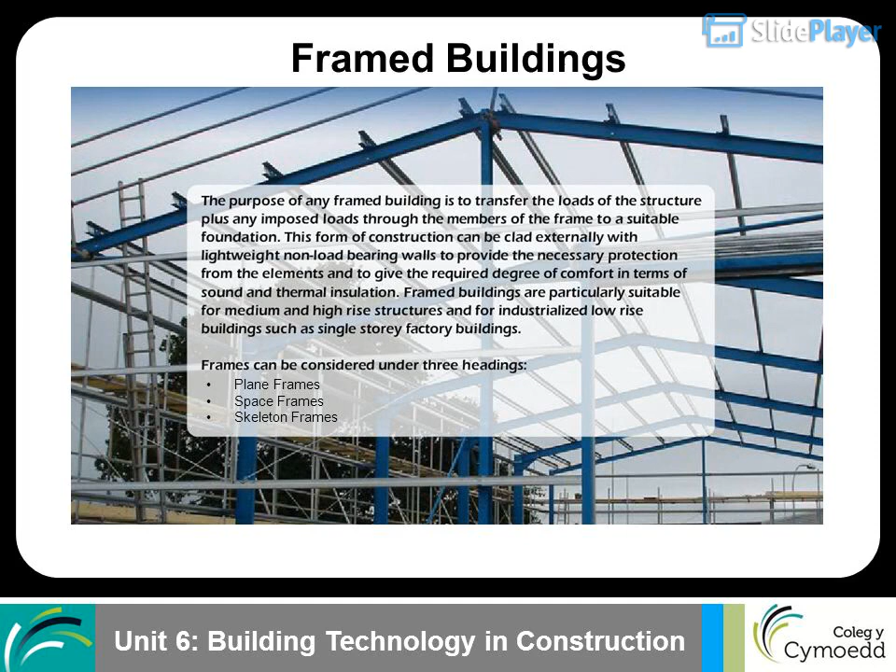Frame buildings: plane frames, space frames, skeleton frames. Frame buildings, plane frames. These are fabricated in a flat plane and are usually called trusses or girders according to their elevation shape. They are designed as a series of connected rigid triangles which gives a lightweight structural member using the minimum amount of material. What are the main uses? Roof construction and long span beams of light loading.

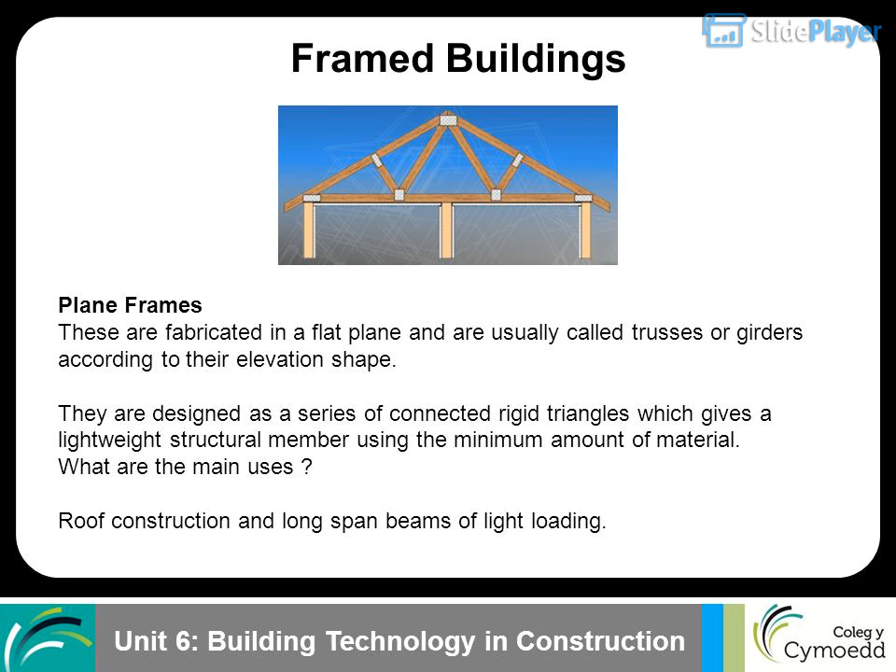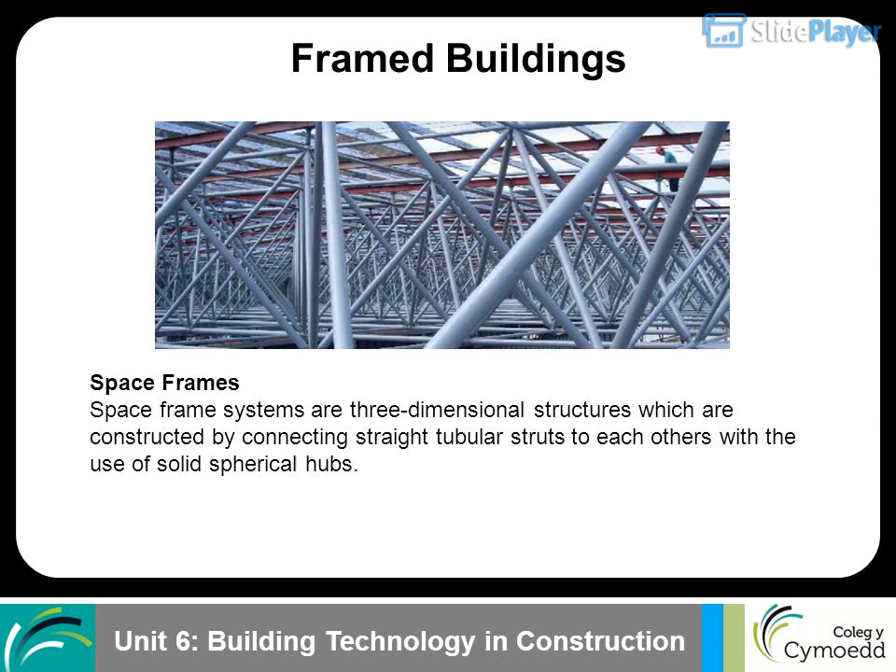Frame buildings, space frames. Space frame systems are three-dimensional structures which are constructed by connecting straight tubular struts to each other with the use of solid spherical hubs. Because space frame systems are three-dimensional structures which work in two directions, for large spans they provide economical solutions. It is possible to cover spans up to 100 m without columns by using space frame systems. They provide great flexibility in the selection of support locations and allow application to different geometrical shapes and areas.

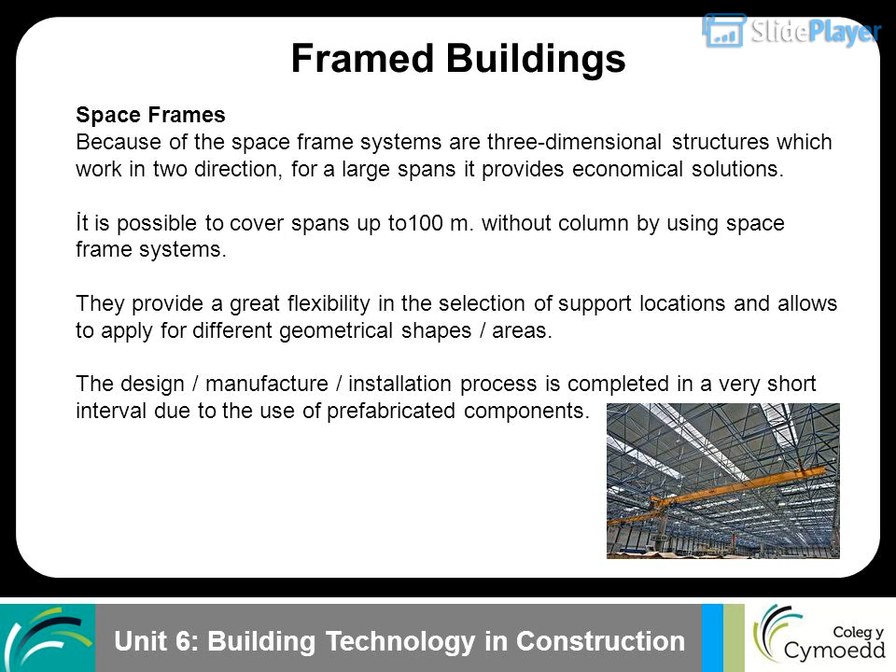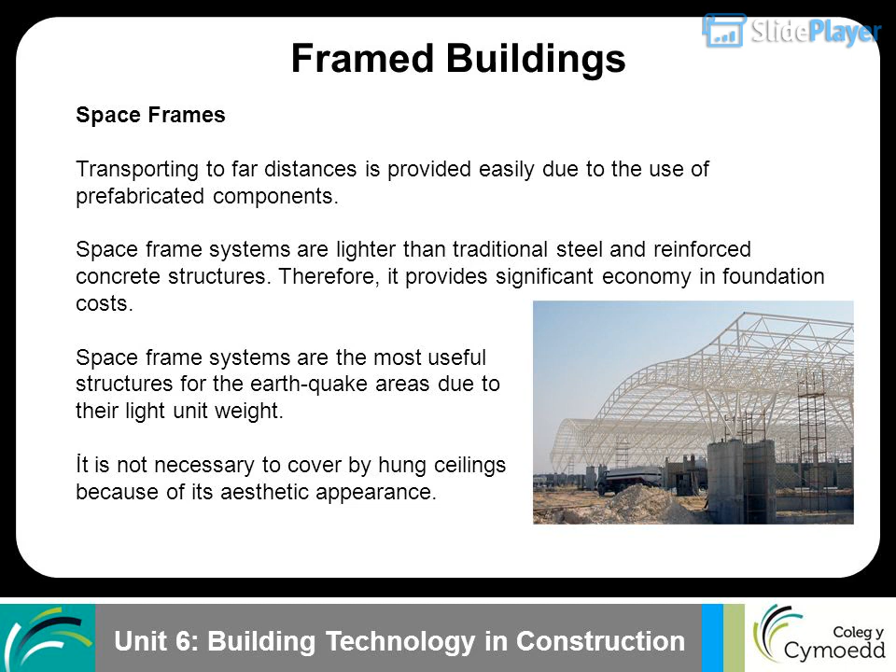The design, manufacture and installation process is completed in a very short interval due to the use of prefabricated components. Transporting to far distances is provided easily due to the use of prefabricated components. Space frame systems are lighter than traditional steel and reinforced concrete structures. Therefore, they provide significant economy in foundation costs. Space frame systems are the most useful structures for earthquake areas due to their light unit weight. It is not necessary to cover them with hung ceilings because of their aesthetic appearance.

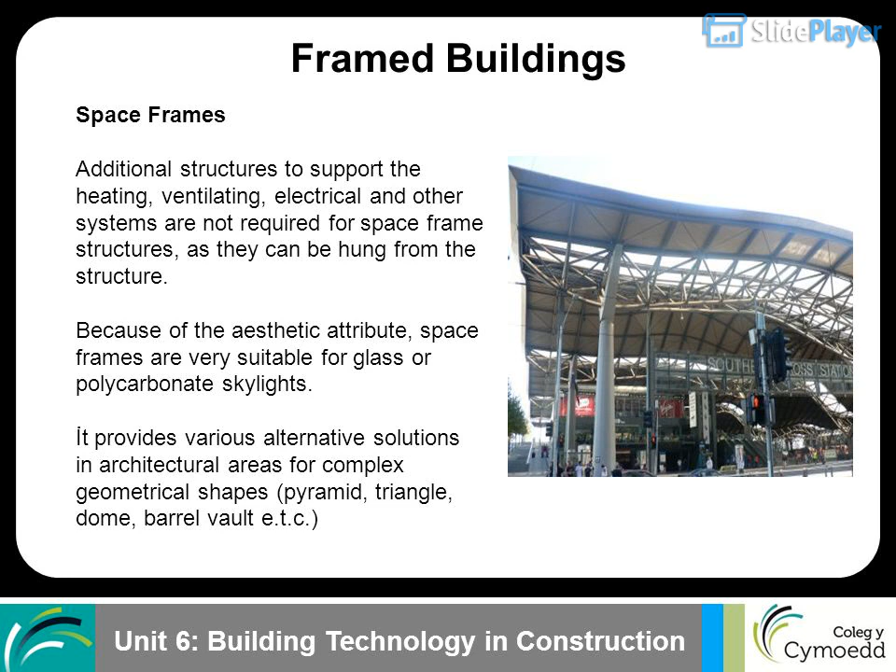Frame buildings, space frames. Additional structures to support the heating, ventilating, electrical and other systems are not required for space frame structures, as they can be hung from the structure. Because of the aesthetic attribute, space frames are very suitable for glass or polycarbonate skylights. They provide various alternative solutions in architectural areas for complex geometrical shapes: pyramid, triangle, dome, barrel vault etc.

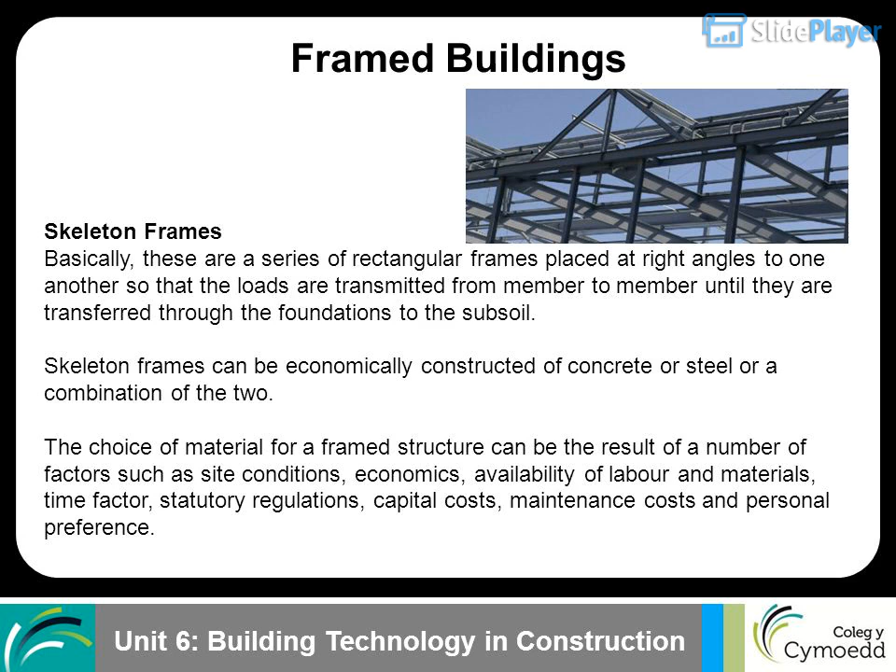Frame buildings, skeleton frames. Basically, these are a series of rectangular frames placed at right angles to one another so that the loads are transmitted from member to member until they are transferred through the foundations to the subsoil. Skeleton frames can be economically constructed of concrete or steel or a combination of the two. The choice of material for a framed structure can be the result of a number of factors such as site conditions, economics, availability of labor and materials, time factor, statutory regulations, capital costs, maintenance costs and personal preference.

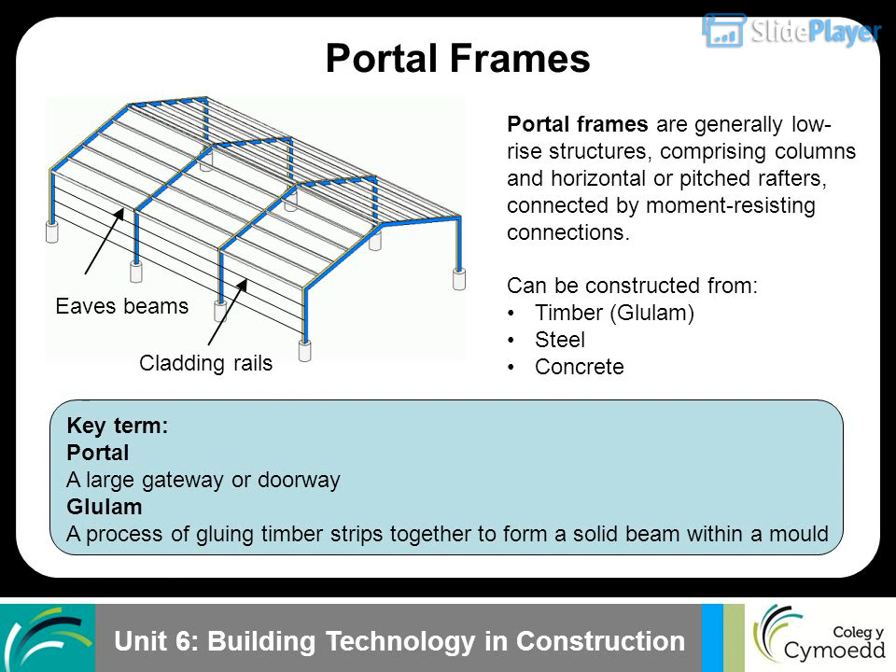Portal frames. Working in groups of 2/3, what are the advantages and disadvantages of using portal frames? What are the advantages? Large spans can be achieved. Speedily erected. Factory-produced quality. Easily extended and adapted. Good height to strength ratio. Lighter foundations than traditional construction. What are the disadvantages? Require fire protection coating. Require coating to prevent rust if constructed from steel. External coatings have to be maintained.

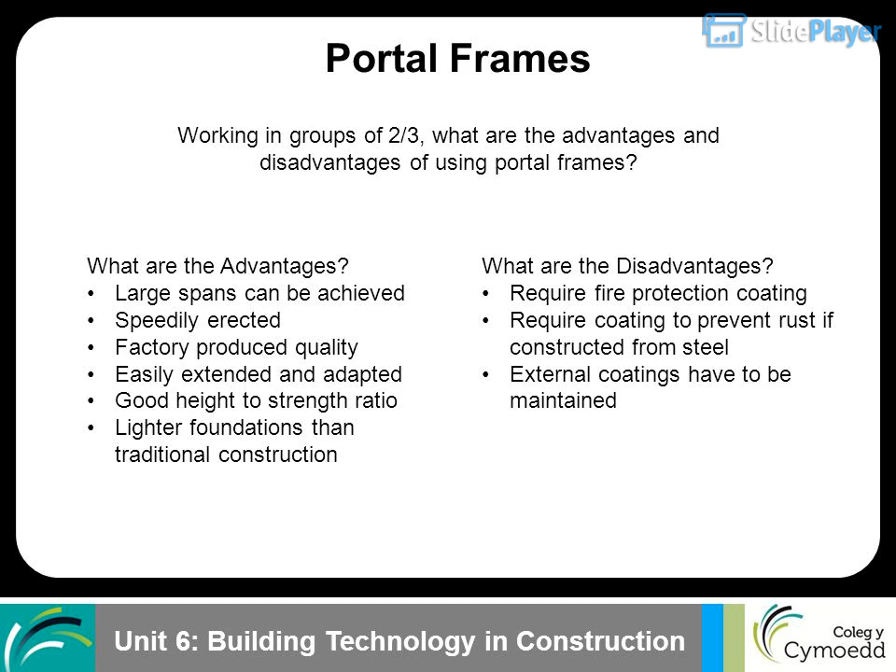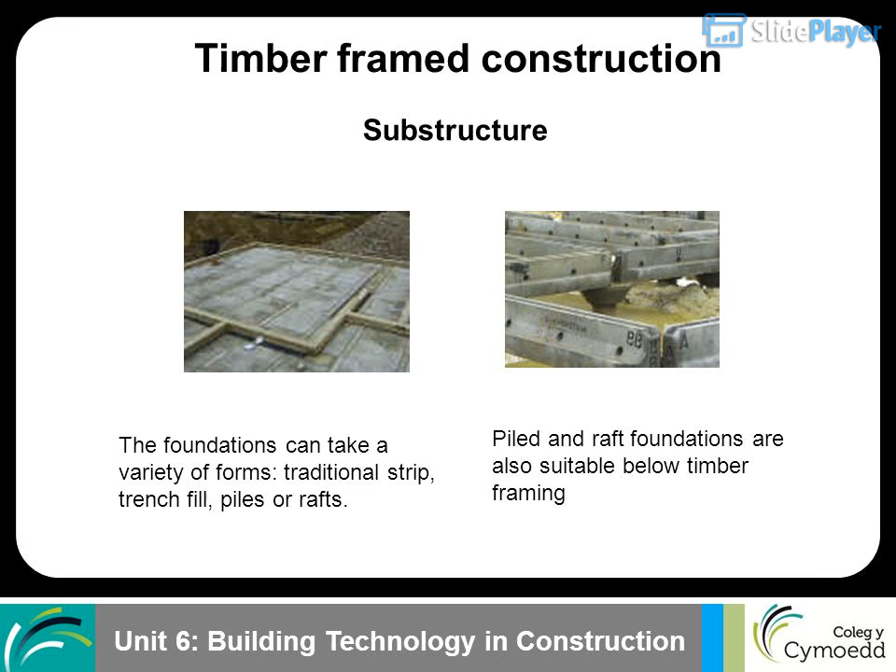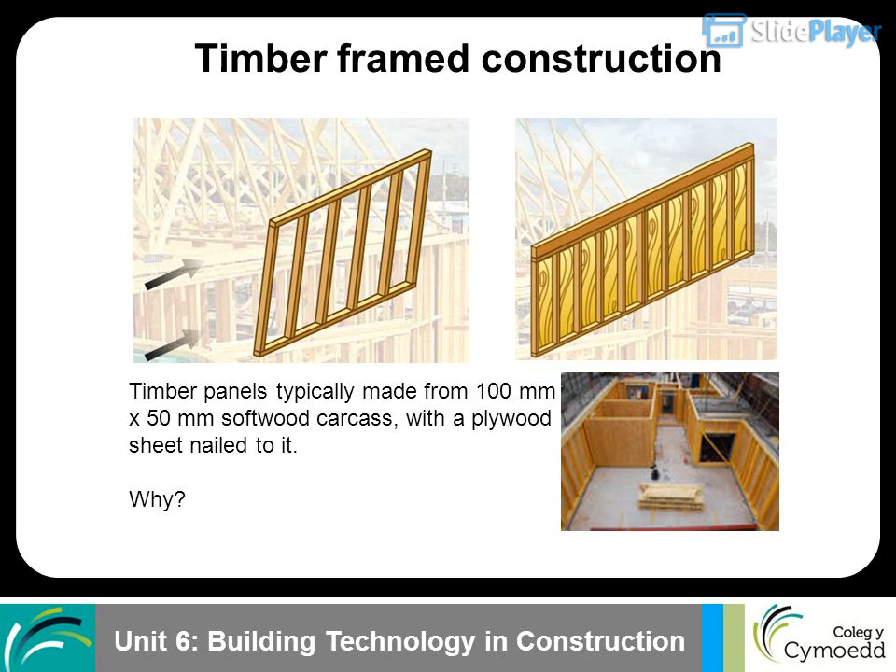Timber-framed construction. Substructure. Piled and raft foundations are also suitable below timber framing. The foundations can take a variety of forms: traditional strip, trench fill, piles or rafts. Timber panels are typically made from a 100 mm by 50 mm softwood carcass, with a plywood sheet nailed to it. Why?

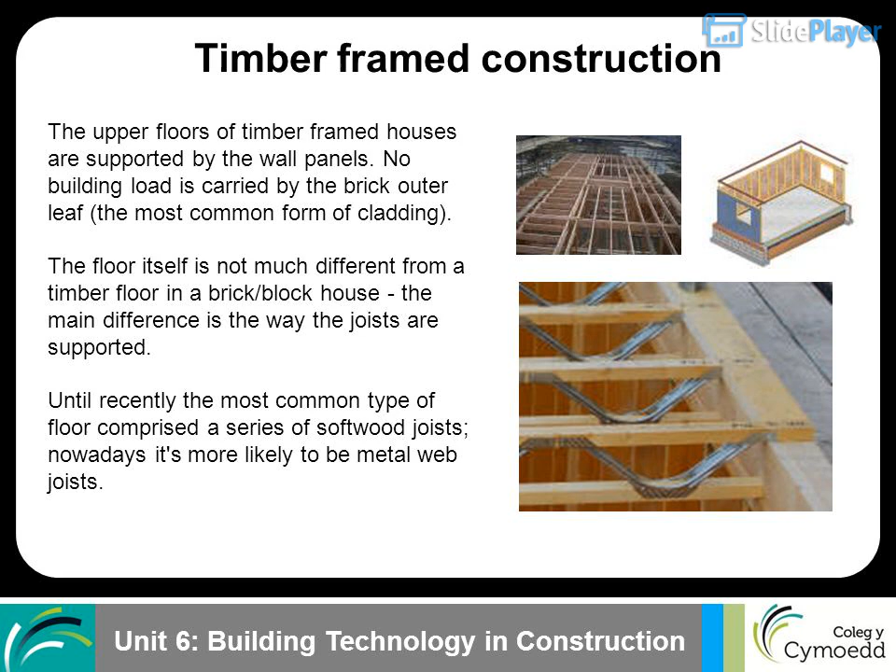Timber-framed construction. The upper floors of timber-framed houses are supported by the wall panels. No building load is carried by the brick outer leaf, the most common form of cladding. The floor itself is not much different from a timber floor in a brick/block house. The main difference is the way the joists are supported. Until recently, the most common type of floor comprised a series of softwood joists. Nowadays it's more likely to be metal web joists.

Timber-framed construction. The roof usually takes the form of prefabricated trusses and is virtually the same as a brick and block house. In fact, it's only by getting into the roof space that you can easily tell if a modern house is timber-framed or not. In some developments, the roof is constructed on the ground and lifted into place by crane. When the roof is felted, work can continue inside the house. The brick face work, the normal finish, does not form part of the critical path.

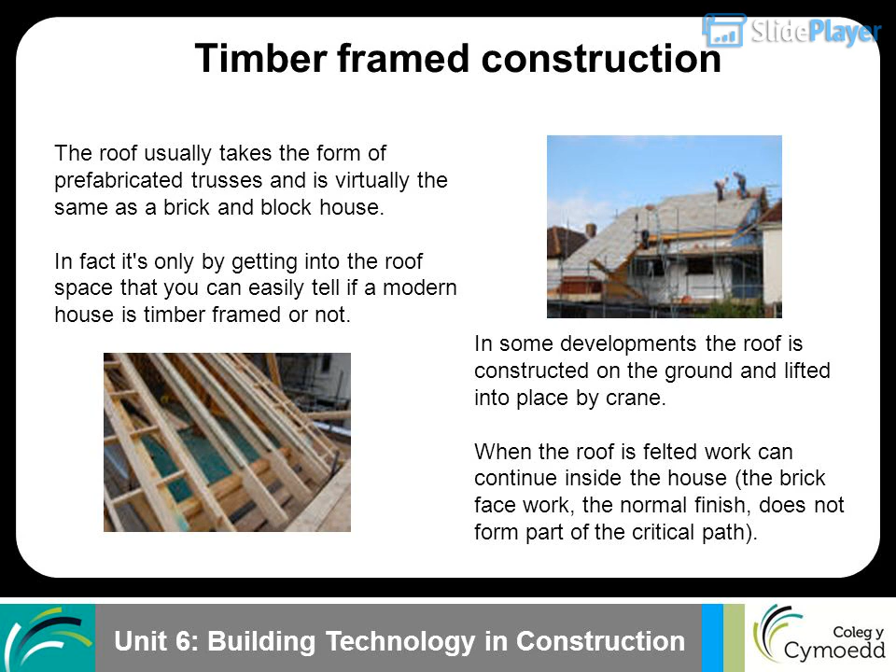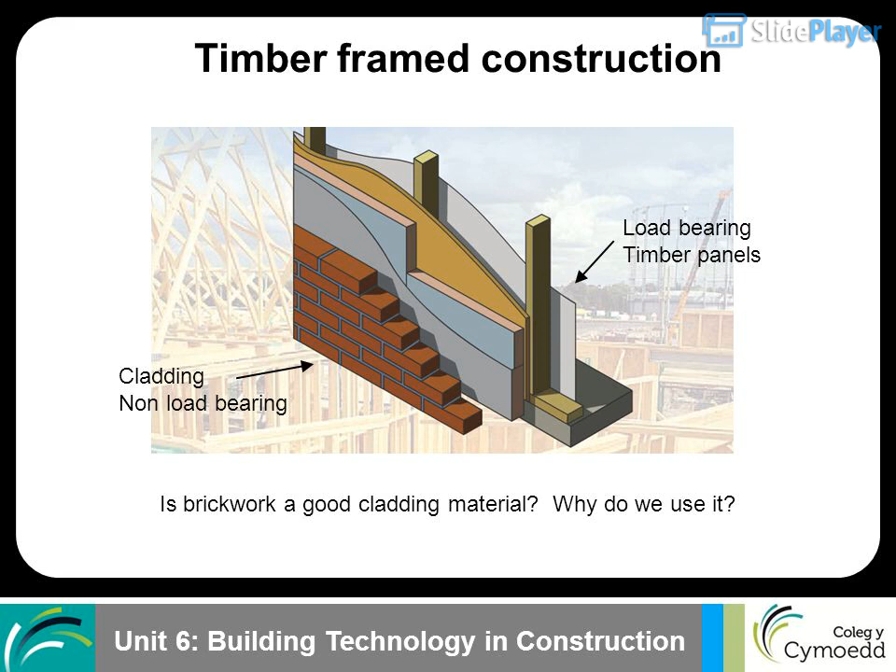Timber-framed construction. Load-bearing timber panels. Cladding, non-load-bearing. Is brickwork a good cladding material? Why do we use it? Brickwork, however, is not necessarily the most practical cladding, for three main reasons. Its weight means it cannot be supported by the timber frame and therefore requires a foundation. A freestanding wall would soon buckle and bulge in high winds, so it must be restrained by the timber frame. The method of restraint, wall ties, must allow for differential movement between the brickwork and timber.

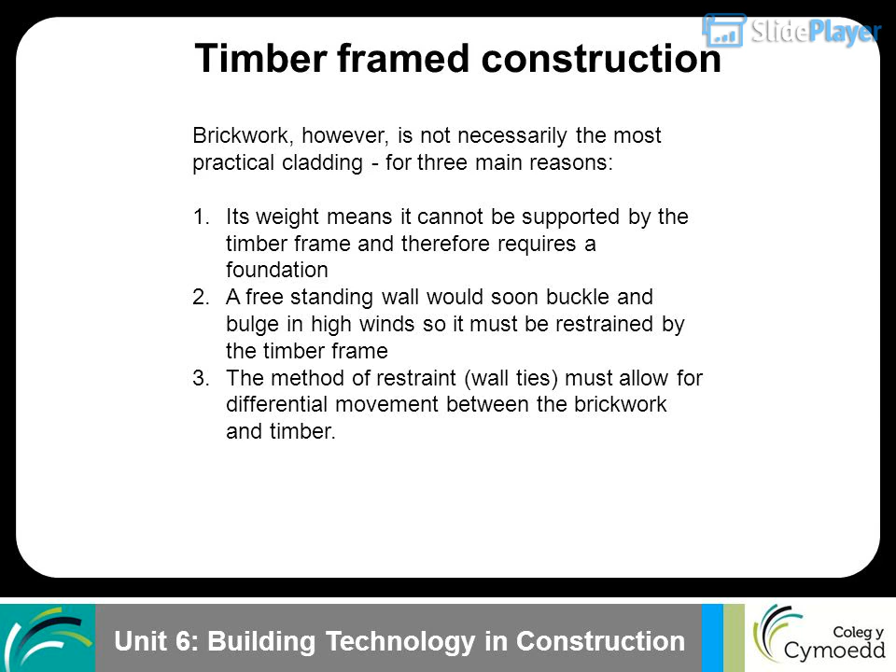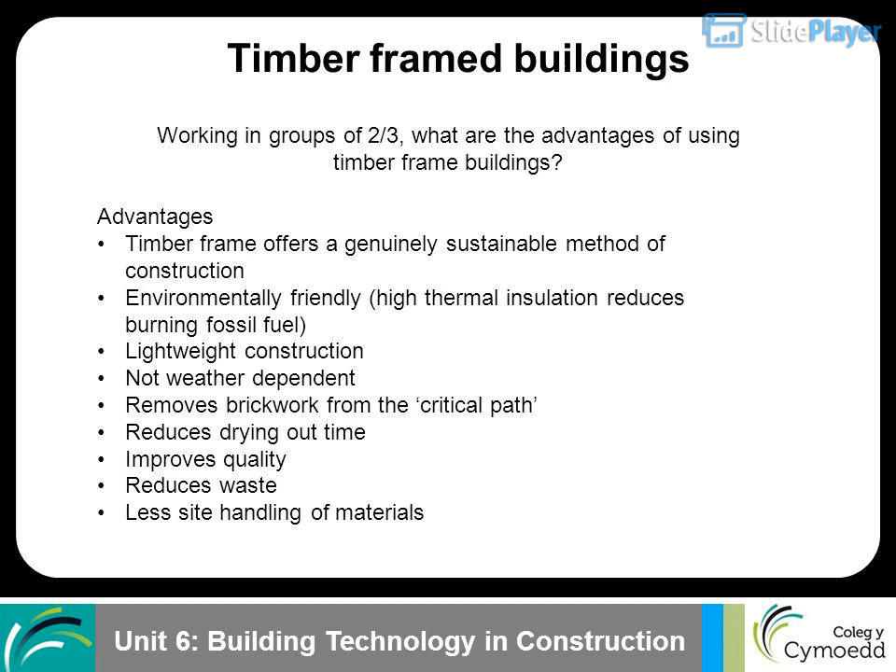Timber-framed buildings. Working in groups of 2/3, what are the advantages of using timber frame buildings? Advantages? Timber frame offers a genuinely sustainable method of construction. Environmentally friendly, high thermal insulation reduces burning fossil fuel. Lightweight construction. Not weather dependent. Removes brickwork from the critical path. Reduces drying out time. Improves quality. Reduces waste. Less site handling of materials.

Timber frame buildings. Working in groups of 2/3, what are the disadvantages of using timber frame buildings? Disadvantages? Additional design and engineering time up front. Potential lack of experienced builders, erection crews and following trades. Transportation and carriage access. Site storage. Exposure to weather before enclosed. Susceptibility to decay of timber when exposed to excessive moisture.

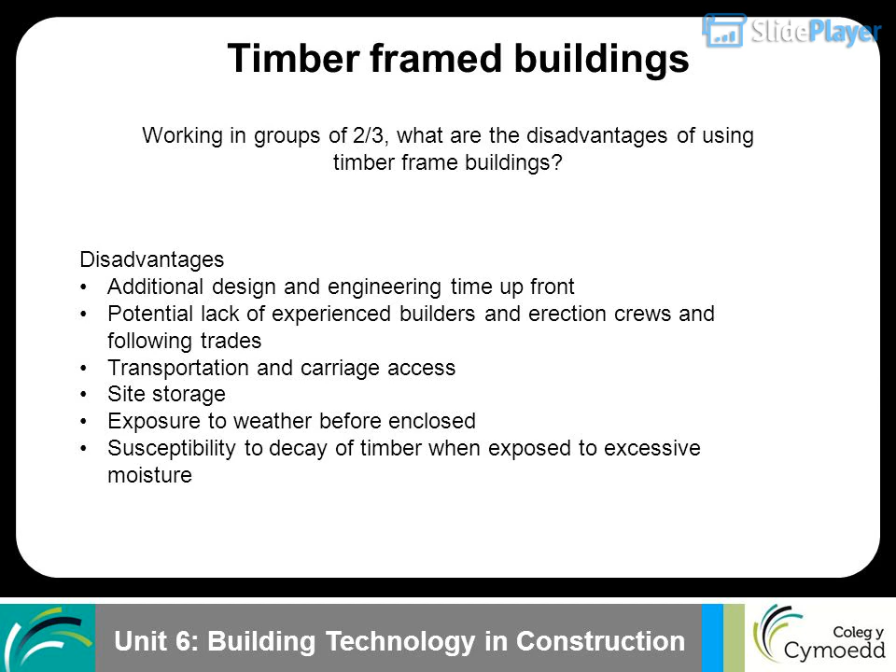Kit houses. This video illustrates a kit house which is built in as little as 5 days. Huf Haus is a company from Germany that puts these luxury houses together as a kit, which are energy-saving and constructed in a sustainable way from prefabricated sections.

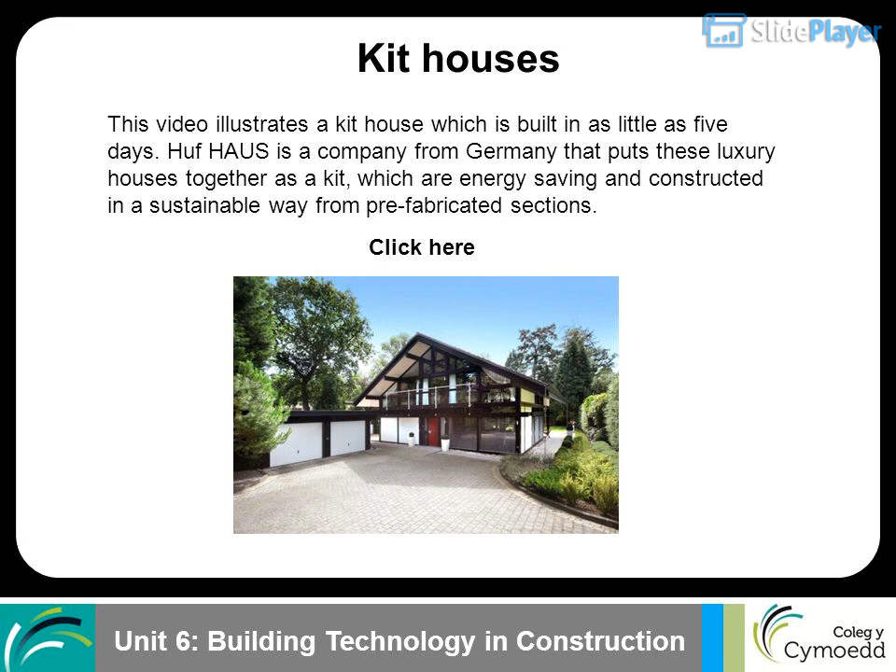Concrete frames. What are the advantages? Inbuilt fire protection. Can be molded into any shape. High strength in compression. Does not require a secondary finish. Fast construction period using precast. Variety of surface treatments can be achieved. In situ. Precast. What are the disadvantages? Require support, shuttering, initially. Craneage required. Poor strength in tension. Highly skilled workforce to assemble.

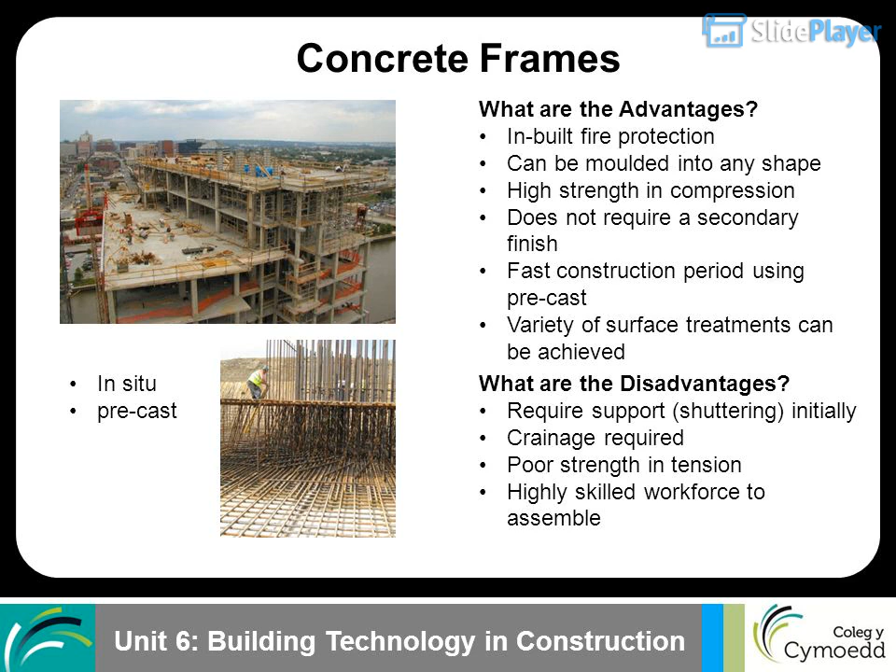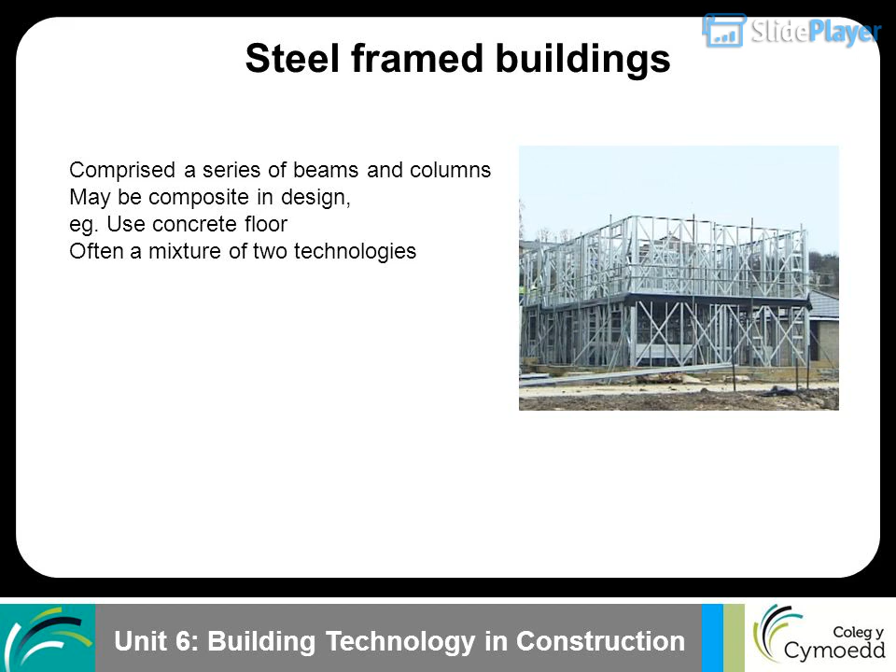Steel-framed buildings. Comprised of a series of beams and columns. May be composite in design, e.g. use a concrete floor. Often a mixture of two technologies. Roofs. What forms can roofs take?